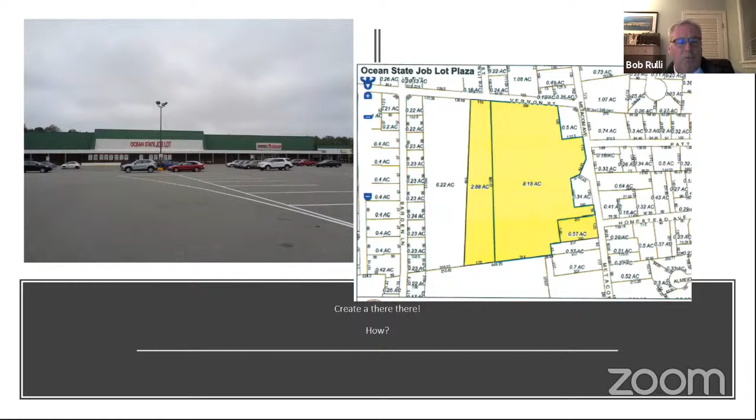So we hope that through this process, the public process, and adoption of the form-based code, owners are incentivized to start thinking about redevelopment. With funding from the SNEP grant, we engaged both Fuss and O'Neill and Union Studios to put together this conceptual master plan. This is an aerial view of the site, which you've all seen many times before.

What I wanted them to look at is what I envision at this location: a town center or village center, something that can serve all of the residents of Warren and the area, but also respects the residential neighborhoods on either side of Metacom, so it doesn't overwhelm them, while also providing services so residents aren't as dependent on their car to go to different places.

When we look at what's there now, there is a surplus of parking. Down in the lower right is the auto body or repair shop, which is not part of this parcel. However, we would hope that if development starts to happen in this area, somebody would have the foresight to see there's value there that's higher and better than the current use.

This is a Lauren's restaurant. We haven't done anything with that yet, as we've developed a plan that could potentially have it stay. It's not the most architecturally offensive building in town, but it's also not winning any architectural awards. At least it's a bit more contemporary in design than some of the other things we see on Metacom Avenue. This, if you see my cursor, is the pad site.

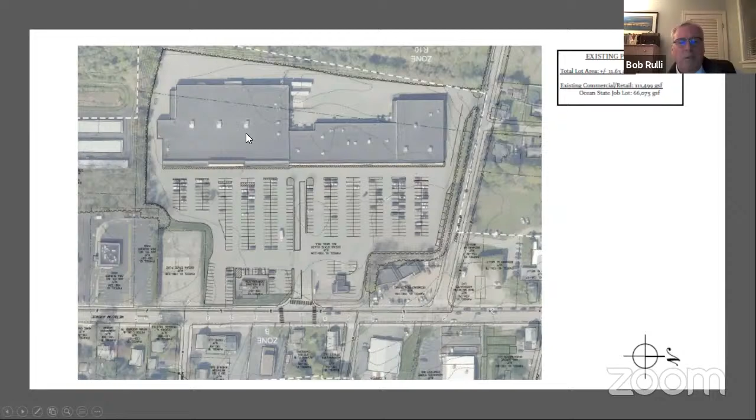So when we did this, this is what we call a massing study. This is looking at the configuration of the site and what we could reasonably put on that site.

When you looked at some of the things in the form-based code I sent out earlier, it talked about alleys, and people would say, well, we don't have any alleys in Warren. But with this type of development, you actually potentially could, particularly with respect to some of the housing options. This looks at one entrance using the existing traffic light that's there.

Next to the pad site, there are actually 2 additional curb cuts. That makes no sense because that would just be a traffic nightmare, and we're trying to improve traffic in that location. The other piece is that we would have an exit onto Vernon Street. This is primarily residential in that corner of Vernon Street, but there would be no ingress into the site from Vernon Street—that would simply be an exit.

You might have noticed we included a public amenity, a performing arts space. You might ask why. We know some local education institutions had been considering the construction of public performance art space prior to COVID. We have every reason to believe that when things come back to whatever the new normal is, that could still be a possibility. Certainly many people miss having second story theater in town, and there are a number of East Bay arts groups looking for performing arts space. For whatever reason, that didn't come to fruition.

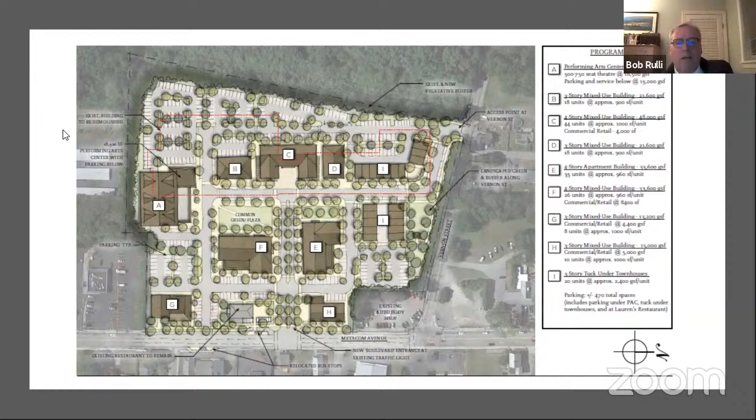And just, again, this is an early stage conceptual drawing, a bird's eye view of what this potentially could look like. Not to say that it's going to look like this, but I wanted to offer some context of what the scale was in terms of what we were creating.

I think the largest story we have is 4 stories. Most of these are 3 and 4 story buildings. Again, the Lauren's Restaurant, you'll see that's to the scale that it is now, that stays. That potentially could be another development site. And then we've got the car repair in the corner.

So again, the idea is that you have one entrance, circulation through the site is one way. You create some public space, you have trees. The Performance Arts Center is here. That backs up to a storage facility, so it's not imposing on any residential.

But again, in my experience doing these projects, people are more visual learners than seeing things in the abstract, and this just gives some sense of what that scale will be. Now, I will say that what we're proposing here is almost double the amount of gross square footage that is taken up by that one strip of Ocean State Job Lot. But certainly this looks a lot more palatable in terms of the green space that it creates and just what the configuration of the lot looks like.

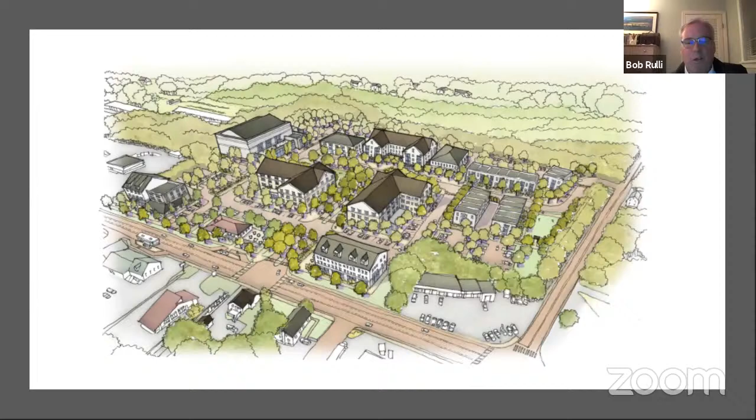And these are just samples of different housing styles that are done in projects like this. You've got townhouse, row houses, apartments, condos. Again, just to give some sense of scale and the type of architecture that you would see in a project like this. And the form-based code will dictate what that housing is going to look like, what those housing choices will be, what those materials will be.

I think another important part to mention about the form-based code as it relates to housing is that, as you saw in what I sent out in the table of contents, the form-based code is very specific in terms of addressing affordable housing or mixed income housing. There are bonuses that can be offered. So if something was projected to be 3 stories, you might go 4 stories if there was a commitment to provide more mixed income housing. But it can be very specific in terms of what the mix of that housing is.

So when I did projects like this down in Virginia, we essentially said we would be trading density, which is the amount that you can build on a site, for units. And it's a very progressive economic development tool that developers appreciate because they get to build more. They still get income coming from the project, and they have an opportunity for additional units. Similarly, this is the type of mixed use architecture that you would see.

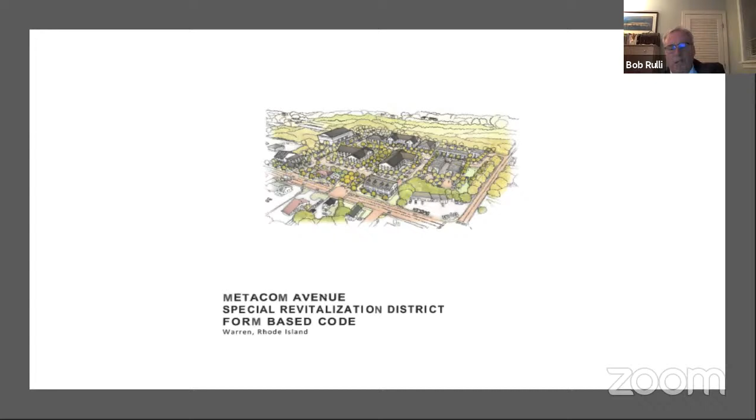My expectation is by our February planning board meeting to have another chunk of that available for you to review. We will not ask you to sign off on the document until it's entirely complete, so the community has had a chance to see it. And then it would be referred to the town council together with the zoning amendment for them to hold public hearings.

So as you'll see in later sections, many of those pages are going to show height, where a building is sited on the site, the uses, the elements, and give a narrative about that. It gives different examples, and this isn't just for the Ocean State Job Lot site—it's for the entire corridor.

It will show where different building types are appropriate. Some of those early pictures with existing small one-story buildings that back up are typically on the eastern side of Metacom. We don't necessarily want to put a 4-story building backing up to residential neighborhoods in Laurel Park, but we might want to put a 2 or 3-story, and we need to think about this.

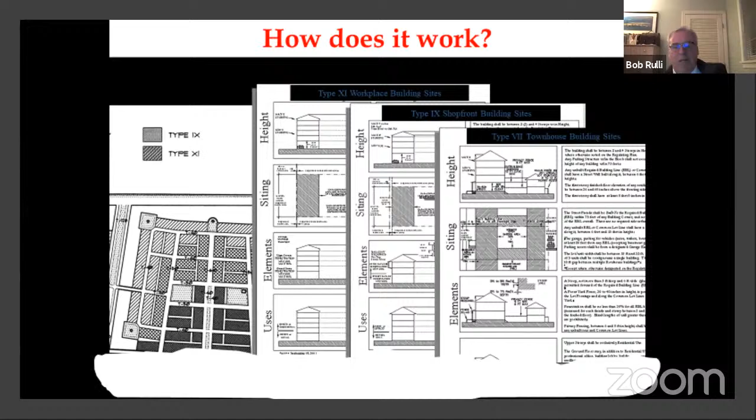So the form-based code will be a roadmap in order to do that.

Again, it gives a very detailed narrative on how things are developed, and developers like to go to this and look at it and say, okay, they can do a pro forma and say, I can build this much, it's going to cost me this much, the return is going to be this—it's very predictable, it's only going to take me X amount of time. This is something I'm interested in doing.

If somebody didn't want to follow the form-based code, they still have the option to go through the normal approval process. They would come before the planning board for conceptual review, and if they needed any kind of dimensional relief, they'd still have to go before the zoning board. As we know, that could extend the approval process for months or even years. But going through the form-based code, knowing you're checking all the boxes, saves a significant amount of time.

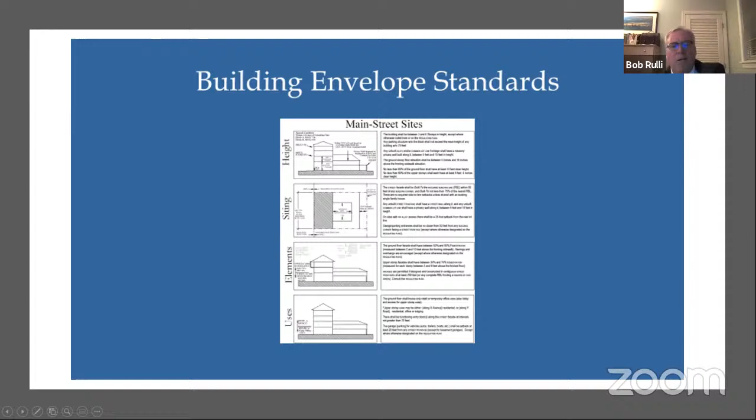The design guidelines will be specific. They'll address, as I said, housing. They'll address signs, materials, street trees, and parking. All of those get included within.

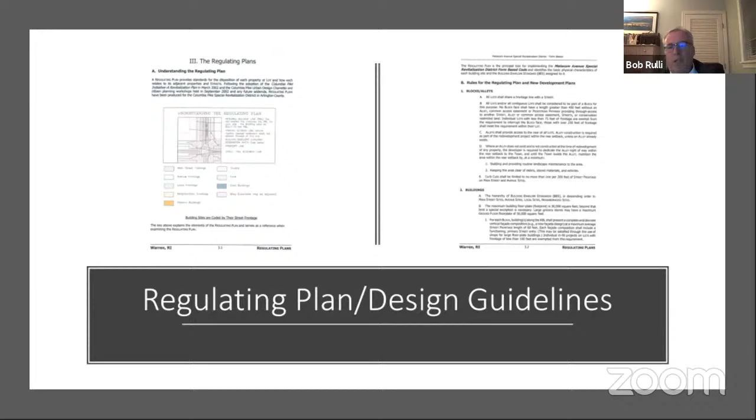Some of those are more relaxed than our current zoning requirements. We think with some traffic and transportation improvements that instead of requiring 2 spaces per residential unit, we can reduce that to 1.5 spaces, with the expectation of improved access to public transportation. Certainly after COVID, with more people able to work remotely, the need for 2 cars per household may not necessarily be there anymore.

Just one more picture—this is a 4-story building. You'd want to pull the buildings closest to Metacom so you create a street edge. As you get back into the project, that's where you'd have a mix of more residential, with some smaller opportunities for commercial. Again, none of this is set in stone—it's just to give you context on what form-based code can be and what could happen with a little hard work and imagination.

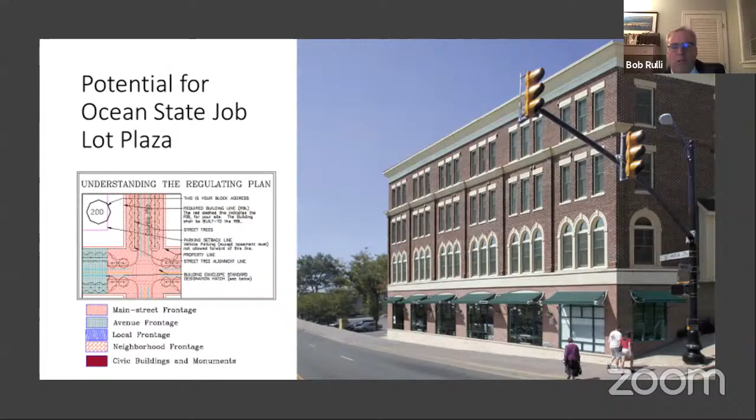I wanted to include this because we've talked about where we are with respect to the comprehensive plan. I felt all along that an update to the comprehensive plan had to weigh heavily on what we did with Metacom, because I think this is going to be the guiding direction for where the comprehensive plan takes us. So if we look at these 5 elements required in the comprehensive plan—

economic development—does that box get checked? Absolutely it does. If you look at the amount of investment we're talking about—and I'll say right now, if we were to build out the scheme we showed earlier, we're looking at something around $77 million in investment. Could be slightly more, but conservatively, that's what we're using.

Does it address housing? Yes, we're creating about 161 units of additional housing. Transportation improvements—yes, we think creating a 3-lane road rather than a 4-lane road and increased opportunities for public transportation should be part of transit-oriented development, which is what this is. Land use—absolutely, because it takes pressure off the historic downtown area and off the eastern part of town where there isn't infrastructure.

And then service and facilities—if we're able to improve stormwater management, that's to the better of the community. And if we're able to create facilities like a performing arts space available to the public, then that's a win too. So all of these things are interrelated when we start to get into projects like this.

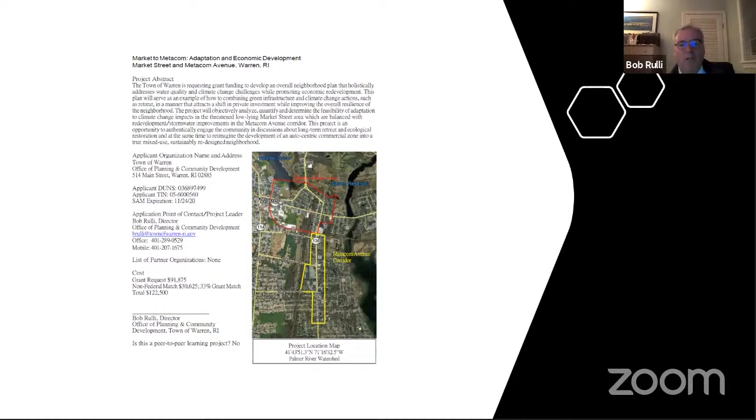SNEP was willing to fund us looking at that study, which is advantageous because when we look at some of the stormwater management tools we would incorporate as part of form-based code, at the Ocean State Job Lot Plaza, these are some of the features. We cannot put out any more stormwater than already leaves the site, and we want to drastically reduce that.

So you have 8 acres of impervious surface area now. If you've gone north to south on Metacom in a rainstorm, it sheets off of that site through the auto body repair shop, picking up all kinds of funky things, and continues down Metacom. Ultimately that's either going to the Palmer River or it's going into Belcher's Cove. So certainly we don't want to add to that.

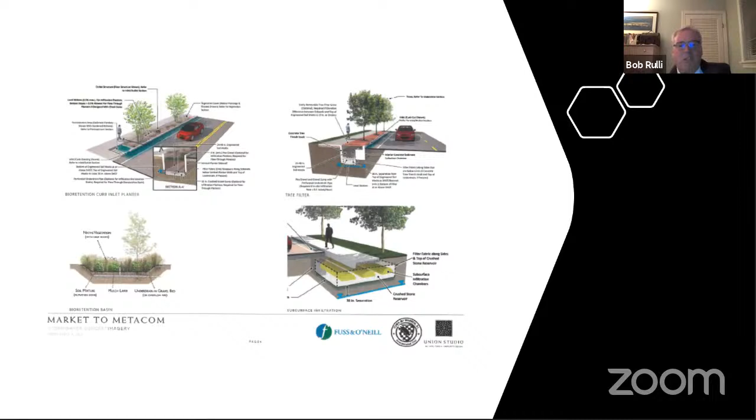So you have these best management practices where you're capturing as much of the stormwater on that site as you can, and you're treating it and slowly releasing it. That's one of the things we're looking at as part of the SNEP grant.

But also, I had the benefit last semester of 2020 to have a grad student from URI available to me to do some detailed GIS mapping in that area. He created over 100 maps for me. This just shows 1 foot of sea level rise on a 1-year storm event, which essentially says this is going to happen at least once a year.

And what you're seeing is that in that once-a-year event, and this is in addition to king tide, not taking into consideration storm surge, you have anywhere between 1.5 to 2.5 feet of flooding. That's not a good thing.

I use a photo of that intersection with the entrance to J Mills Park and Market Street, where on that corner you have an auto body repair shop, a dry cleaner, and had a furniture stripping business. Those are all environmentally unfriendly uses, and when you have flooding going into those buildings, there's a high likelihood that those chemicals are leaching back into the public domain. So it's something we can't ignore.

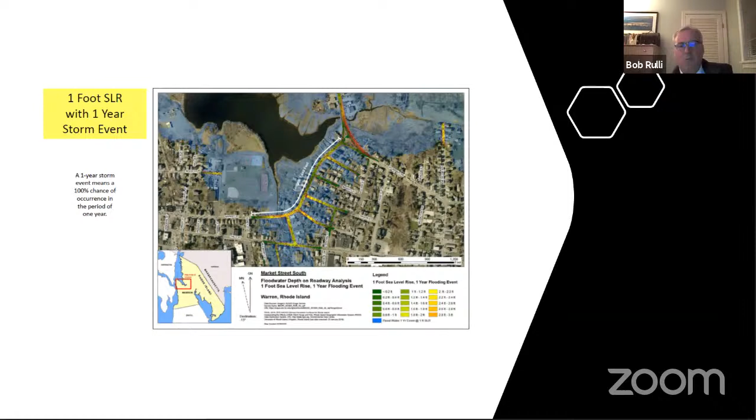This is a very conservative look in terms of what sea level rise looks like. But also, we look at this as a 100-year event. Superstorm Sandy was a 100-year event. We're having more and more of those. The frequency of those storms is increasing.

One thing I've asked the people at URI and CRMC to look at is we tend to look at storms in 50-year and 100-year terms. I think it's important that we start doing some of our mapping looking at 10-year and 25-year events.

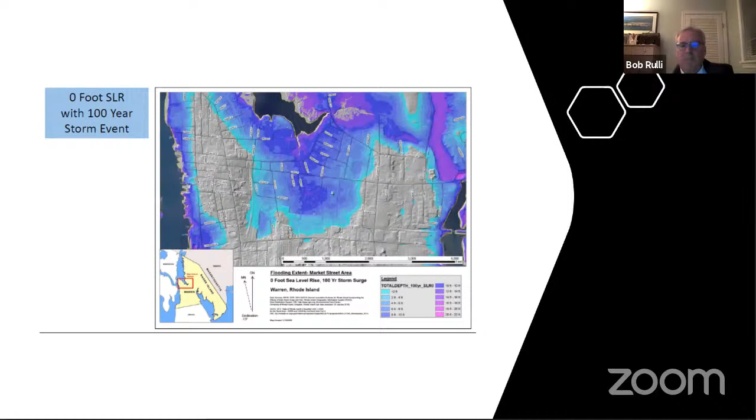Banks don't do 100-year mortgages. Banks used to do 40-year mortgages, they don't even do those anymore. Most lenders, 10 years is a long time now for people not to refinance, but we're hoping we can use some of this data, both with lenders and with insurers, to say, does this really make sense to keep putting money into this? At some point you're going to be caught upside down, where the losses exceed what you're receiving.

Because rather than complete loss, which is more critical since typically you're not going to rebuild, repetitive loss is more concerning. Repetitive loss means you keep investing money, and it's like the definition of insanity, thinking that doing the same thing you're going to have a different outcome. You're not. It's going to get worse. So this is something we want to share with the insurers, to say as you're looking at your underwriting, does this really make sense from an actuarial standpoint, that you're going to have this much repetitive loss?

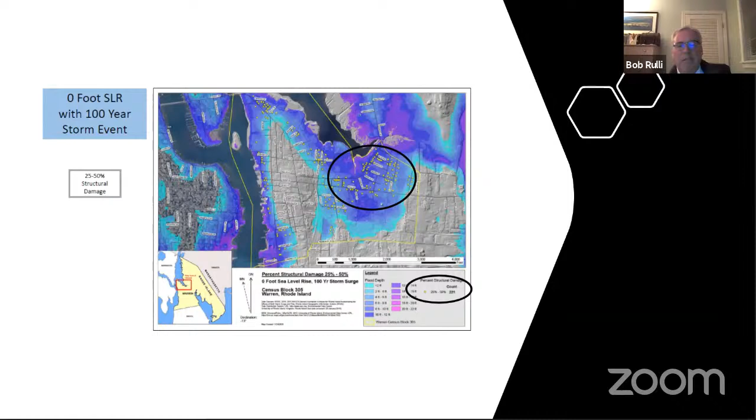So these maps have become very useful to us in conversations beyond just what we're doing on Metacom, and it is part of the funding that allowed us to get this preliminary study done.

Again, public transportation improvements. It makes zero sense to me that you come from Bristol where Metacom is a 3-lane road, you hit the Warren town line and suddenly it becomes a drag race because it spreads out to 4 lanes. The number of traffic accidents we have with people making turns, driving too fast, cutting in front of people is ridiculous. And there's study after study that will tell you traffic flows better at 25 and 35 miles an hour than it does at 45.

25 to 30 is the optimum just because of the amount of braking time and reaction time. But by improving...

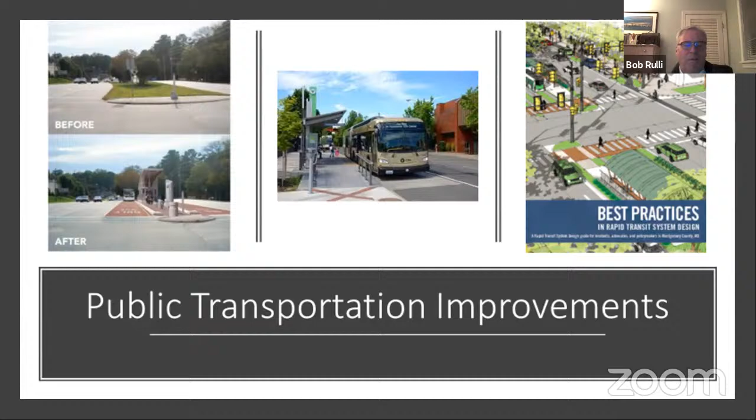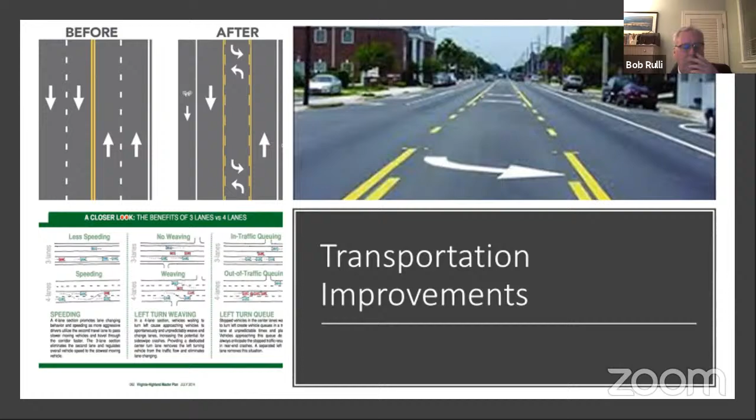Going from a 4-lane to a 3-lane creates other opportunities for us. The turning lanes work. We're trying to engage DOT in this conversation as we start to think about the form-based code and transit-oriented development. This is an existing typical cross-section. By going to a 3-lane road, you'd have your 2 traffic lanes and a middle turning lane, but you also create alternative buffers, whether that's for cyclists or for pedestrians on the sidewalks.

We have pretty decent sidewalks on both sides of Metacom now, but the fact that it's a 4-lane road with that amount of traffic, it doesn't feel pedestrian safe.

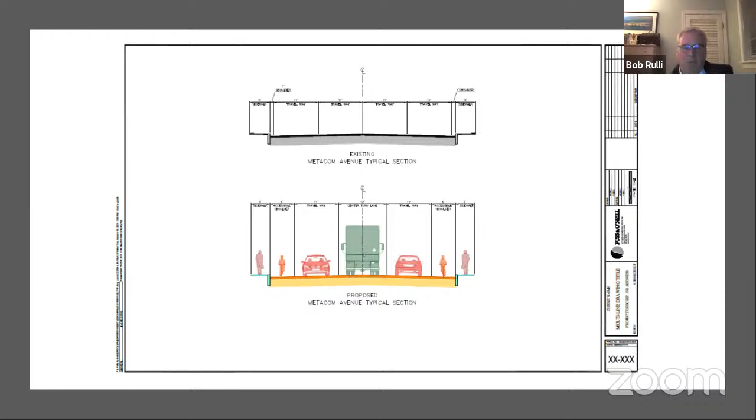So again, it's something that we think through this process that we can bring DOT to the table, and then also the introduction of increased RIPTA bus service. By having a 3-lane road, you can have dedicated bus stations other than the bus stopping in the middle of a lane, holding up traffic, with people then trying to jig in and out. It's just not necessarily a comfortable situation.

As I talked about, as part of this process, we will be putting up a website specifically geared towards both the Market Street and Metacom area. We'll have updates weekly as to where we're going, so people know what we're doing, to share information.

And then again, as the project gets going, both on the finalization of the form-based code, as well as proposed projects that come forward, the public will have a chance, another way to share information with them.